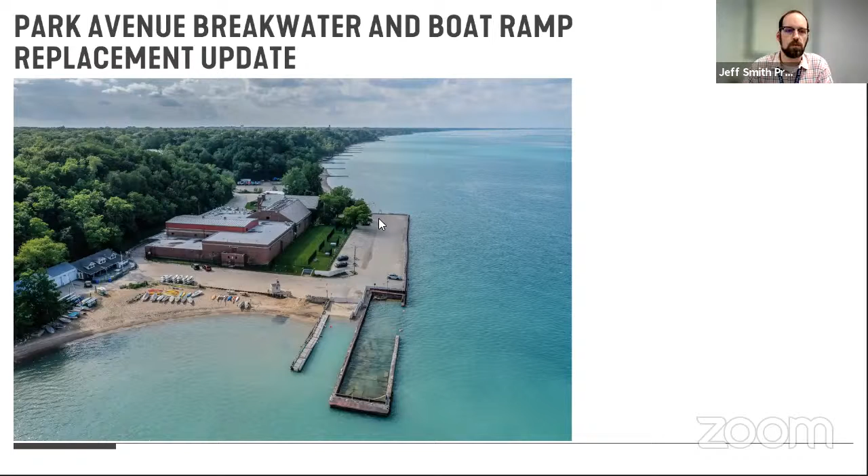So I'll start here, just a reminder of where we've been and where we're going. We are in the final phase 3 of the project that Smith Group is working on. 3.1 was optimize the breakwater and layout, and this was the delivery date for that, and Smith Group did complete that. That was the previous presentation back in October. And then they moved forward with the next step, which is design development, and that they have now completed.

And that's what I'll be providing a summary of this evening. They've also completed 3.3, which is permit application. So they have met with permitting agencies, started to work some of those details out, and submitted plans and applications for that process to begin. And then the final step, 3.4, is the final construction documents. You can see there, January 14th is the final delivery date for those. So we'll talk about the design development, see if the committee has any feedback, and then we would pass that on to Smith Group to make any changes prior to moving to this final stage.

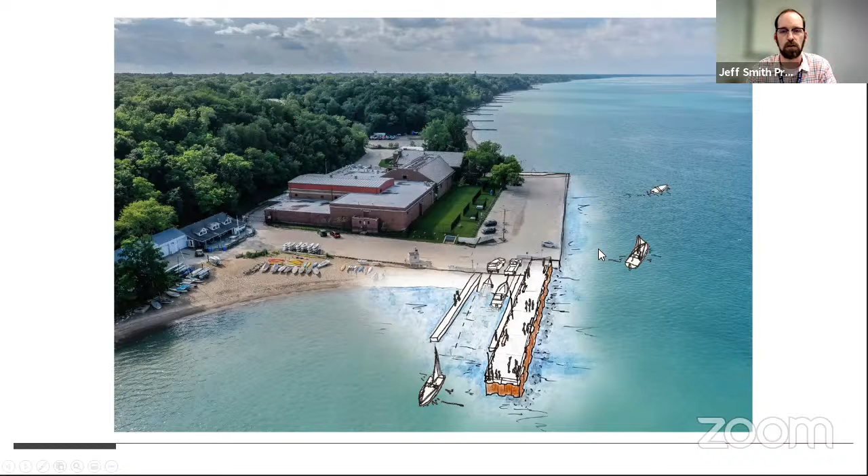So this is the existing conditions. Here is the breakwater structure that's there now, and then we have the launch ramp, and then on the west side is our floating dock.

And now this is showing what the proposed plan is. So this is the new breakwater structure. As I mentioned in that previous sketch, it was set back further here, but now they have shifted it down to align with the edge of the parking lot.

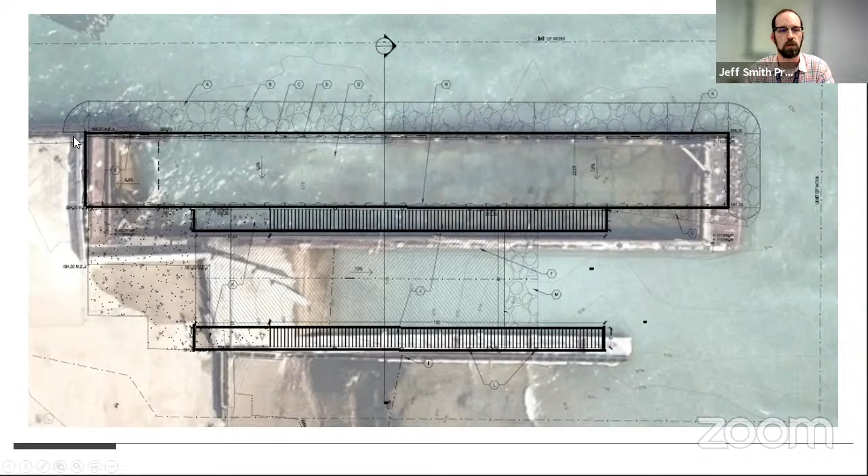There were a few reasons why they originally had it in the other location, but they took the feedback from the last meeting. One of Smith Group's concerns was that it would potentially put us outside of the footprint of the existing structure. But this design has been shown to the regulatory agencies, and they've confirmed it would be considered within the same footprint. The armor stone along the edge falls pretty much in the same footprint, so it won't be an issue from a permitting standpoint.

Secondly, you'll see at the end of this presentation an updated opinion of probable construction cost. They do not feel it would be any additional cost to do this, even though it will widen the boat ramp by about 5 feet.

So here we've talked about, we have floating docks on both sides of the ramp. It's difficult to see from this, but I'll say one change from the previous drawings from Smith Group and their previous cost estimate was they had the floating docks at 80 feet long each, and they've now extended that to 100 feet. So they're each 100 feet long.

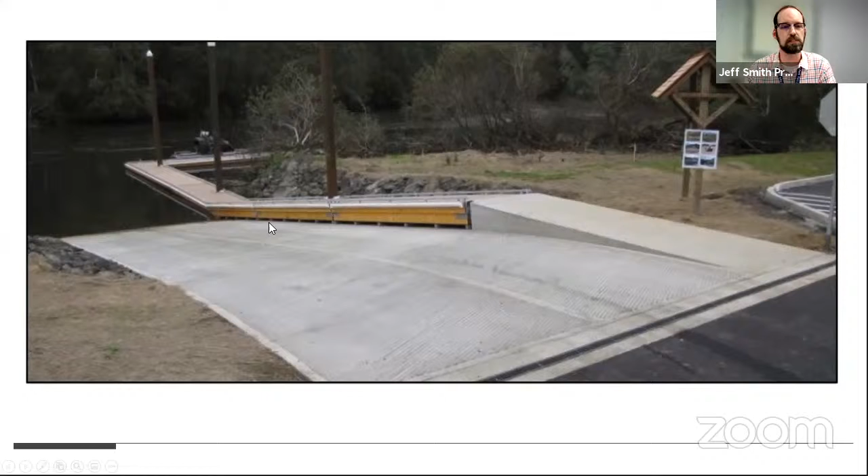Now, I'll start by saying this is from a location where the water obviously varies in height, a lot different than ours. The poles will not be near this high. It probably won't be much higher than the height of the breakwater structure. But the idea is that it adjusts at all water levels. So if the water was up to, let's say, this point, then this section right here would also be floating. So it adjusts, and when it's not floating...

Now, as I mentioned earlier, we had the parapet wall along the east side. In Smith Group's current plan and their current cost proposal, they weren't showing a bollard and chain on the east side. However, staff are considering this as probably a good option.

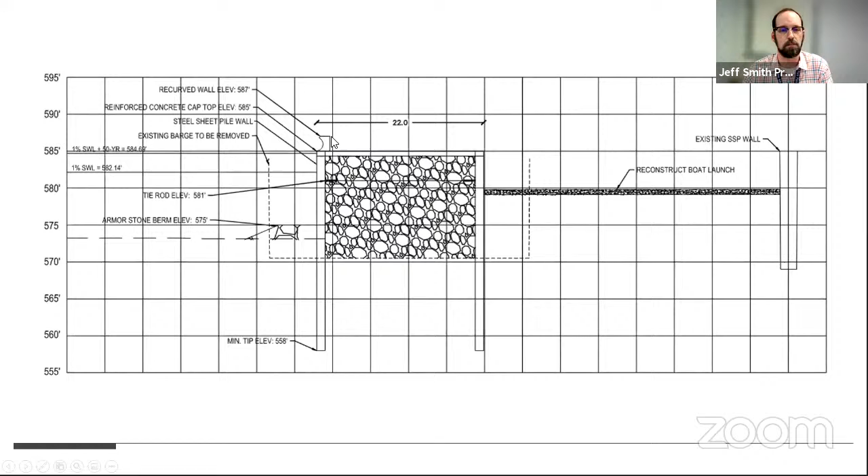And the thought was, though, that if we added the bollard and chain along the east side, we could do it. Actually, I'm going to go back to a photo here. Here's that parapet wall. The bollard and chain could go right here. That, obviously, from a safety standpoint, would be a good thing. It also would deter people from trying to stand, sit, or jump off the parapet wall. You won't see that additional east side bollard and chain in the cost proposal, but it's something we are interested in getting a cost from Smith Group to potentially include as well.

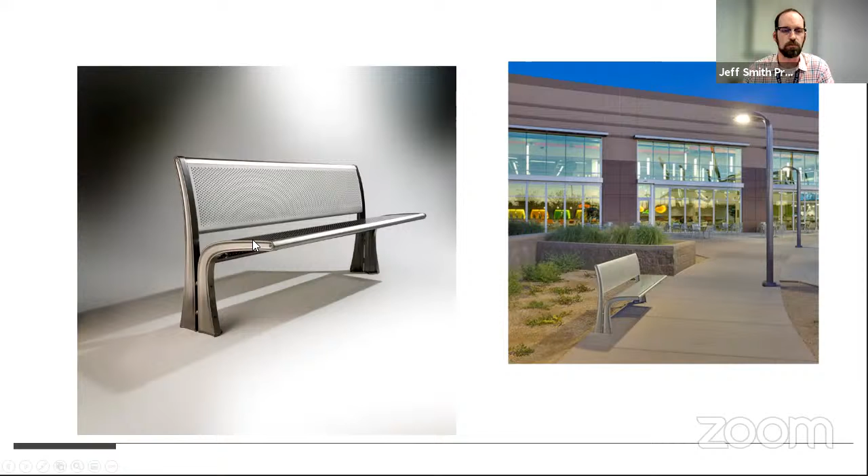Here is the bench that Smith Group is currently specifying. It's likely that these benches would be removed in the winter. This is what we've done in the past on the barge, where the benches were removed in the winter season and then returned in the spring.

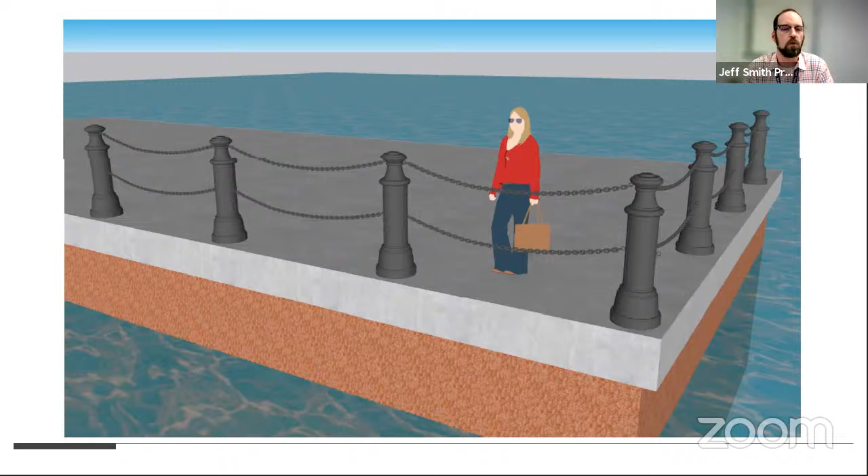Here's a rendering showing the idea of this bollard and chain. I'll add that as far as code requirements go, based on the parameters here and the height and water levels, we are not required to have any type of railing. However, we certainly feel there is some benefit in having something, so this is the railing that they're recommending, and staff certainly thinks is a good fit.

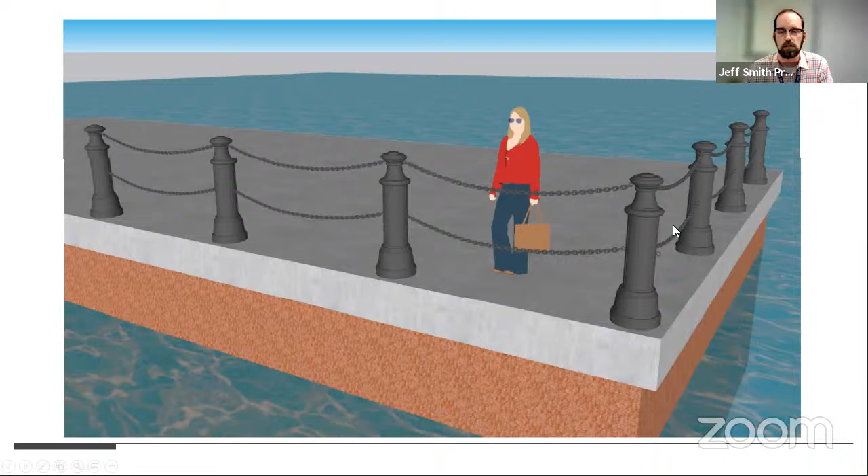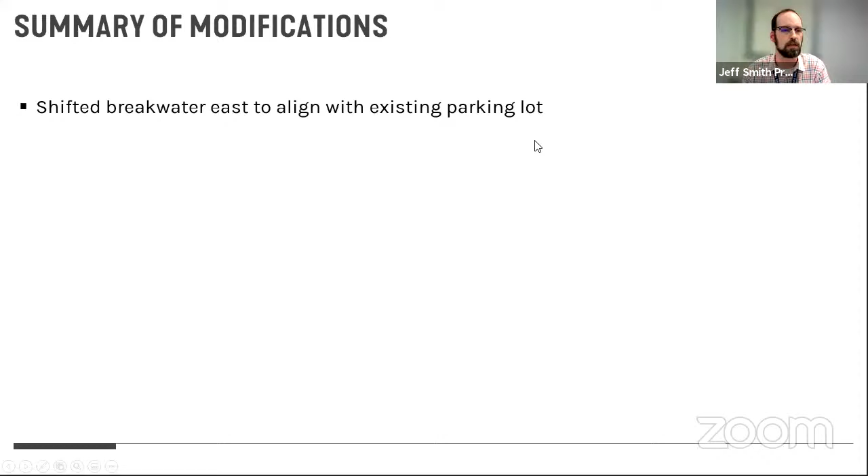So just to summarize some of the changes from the previous presentation to now, at the end of this phase: the breakwater has shifted east to align with the parking lot, we've increased the width of the boat ramp by 5 feet, we've determined it would be concrete abutments for the floating docks and increased the length of the floating dock by an additional 20 feet on each side. The guide piles—the posts we talked about for the floating dock—that system is what's being proposed, and then the addition of bollard and chain on the breakwater.

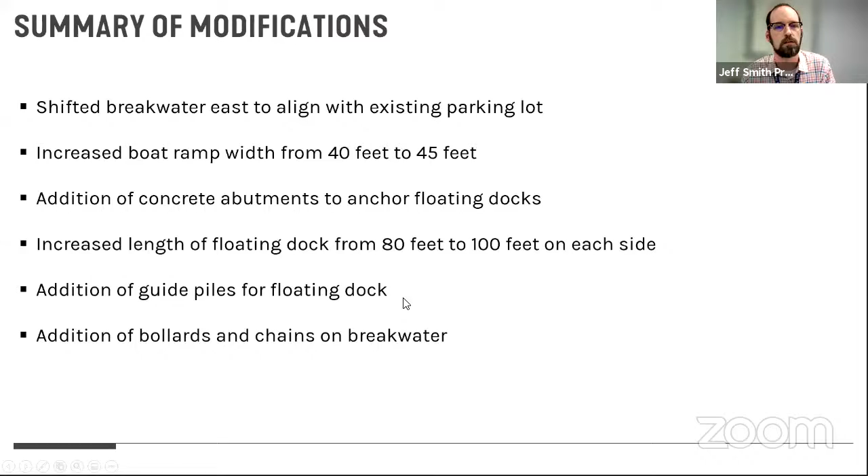So with all that said, this is the current cost estimate. At the end of this phase we get an updated cost estimate, and on the far right is the previous cost estimate shared with the board when Smith Group presented in October, and this is our current cost estimate. Some line items have adjusted as we've gotten a better understanding of the project and refined things, but in the end we're at the exact same price. So the good news is we've increased the ramp by several feet and also increased the length of the boarding docks, but we still have an estimate identical to last month.

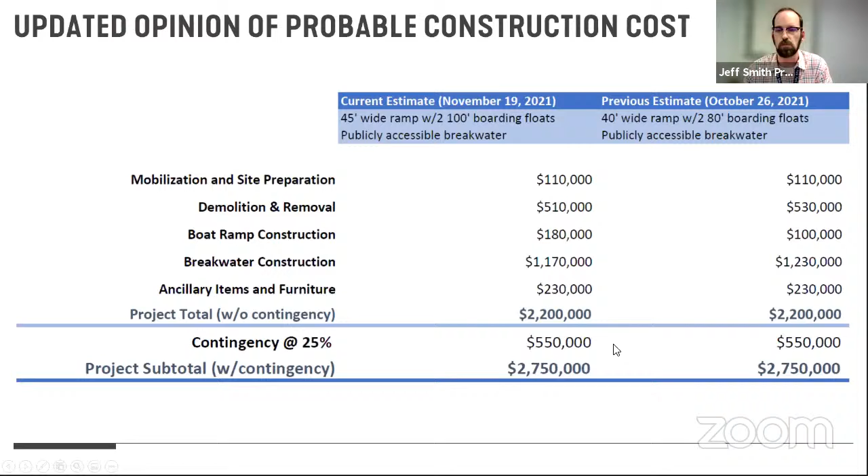I want to touch on some next steps. Staff will continue to review these drawings and receive feedback from this committee. We'll share that with Smith Group, and they'll move forward with the next step, beginning the final construction documents. Smith Group will return to the workshop meeting on December 7th to provide an update to the board. We're targeting January 14th for completion of these construction documents, and later that month we plan to release the bid for this project. We'll likely award that bid in March of 2022, and we're aiming for construction in September of 2022.

With that said, I'm happy to take questions.

Okay, let's go from last to join to first. Mr. Commissioner Bernstein, are you there? Do you have any questions? Yes, no questions. Okay, and how about President Ruttenberg?

Yeah, I have several. Jeff, what's the current length of the floating dock that we use? I believe it's around 100 feet. I'll show you the photo, let me back up here. You can see it actually looks slightly longer in this overlay of where the dock will go, and here's the current floating dock. Okay, so it's right around 100 feet.

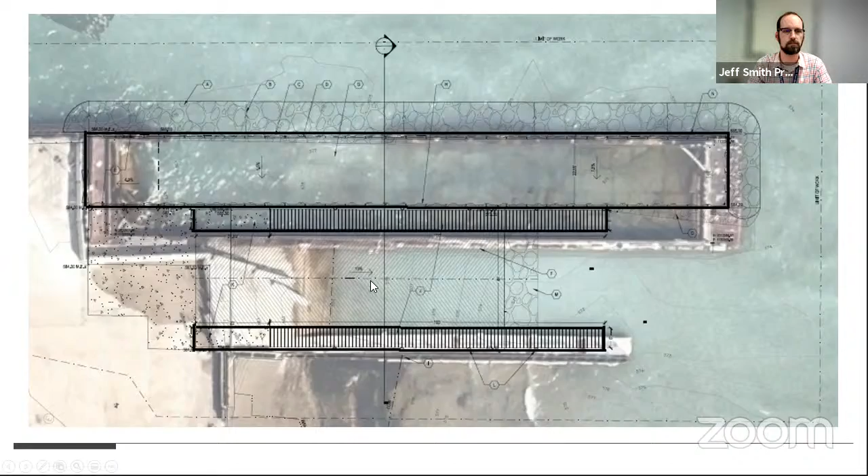The north bollards that separate our facility from the parking lot—can I assume that they're removable so we can get a vehicle out there? Yeah, I described them as permanent, but they're removable, just not as easily removable as these, but yes, they would still be removable in certain circumstances. Okay, because we do need access to maintain the lights at the end, and it will facilitate the Parks Department doing things out there. Correct, yeah, that's an exact conversation we had with Smith about this.

Let me say, I definitely think the benches are cool. And when we look at bollards, we should think about the architectural similarity between the bollards and the benches.

That's just an aesthetic point. There's no question in my mind, as a user of this facility for 15 years, that we do need the chains and the bollards. We need some way to keep the public on the deck and not using it as a springboard for teenagers to dive into the lake. The chains might not completely stop it, but they'll help. I've seen people take a leap off the edge no matter what we do, but it's very dangerous there because of the rocks under the water.

Jeff, why are there two navigation lights? That's what was recommended, but I can certainly talk to them and find out the need for that. Well, I can see a need perhaps to have the middle one as a light to give some light into the boat launch after hours.

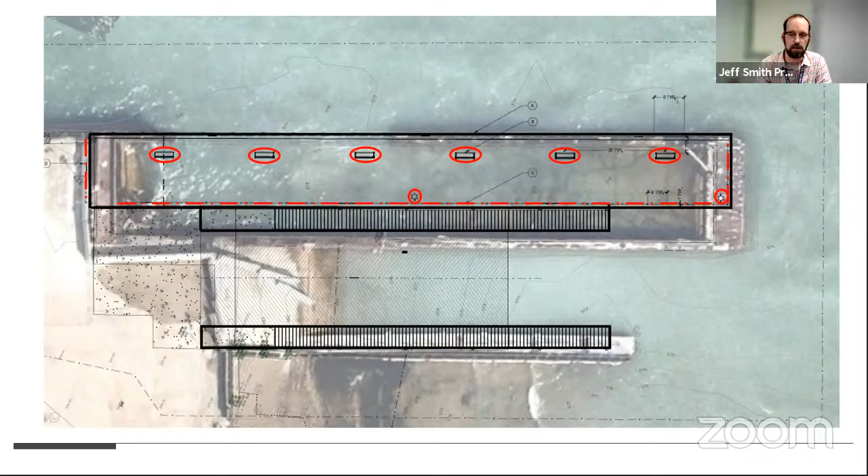My last question, Jeff: are we removing permanently what used to be the supervisor's hut? I don't know if there's any purpose to have it out there anymore. I'm going to leave that to Director Carr to answer, it's more of an operational thing. Okay. Thank you. Sure, I can quickly answer while I'm on the call.

We are looking at some type of structure that our staff would utilize, but that hut has met its useful life. Oh, we definitely have to replace it with something then. When you say for our staff to utilize, for what? We're not going to have somebody staffing the boat launch ramp. This year we did have a coordinator on site, and our plan is to continue to have a staff presence down there temporarily while we work through where to place them. We placed them inside the yacht club this year and may continue that, but we may also look at a different structure. It wouldn't be anything elaborate, similar to what we've had there in the past.

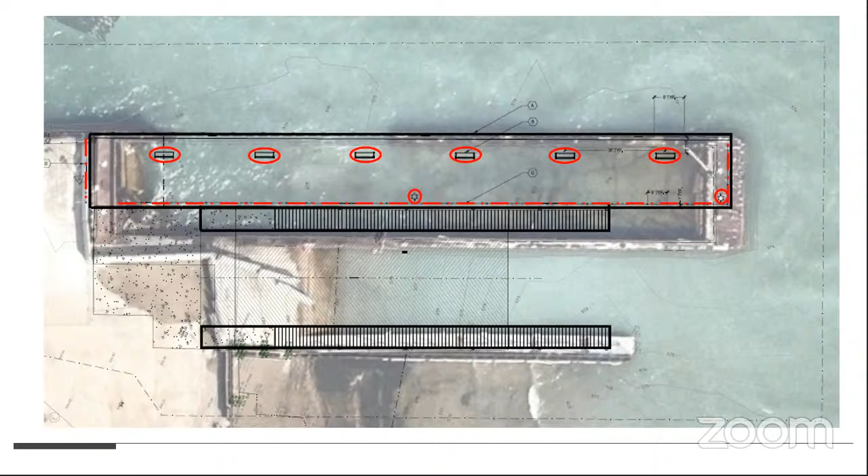Okay, let me stay with that for a minute. One of the prime reasons for putting in the gate was to control access with the thought that we would not need a person down there all the time. So it seems like we're taking a step backwards. This is more about management of the entire property from north to south, the rules, the regulations, the safety, without having lifeguards there, of course, to help manage the property, not necessarily someone accessing the property through their vehicle. Well, that's something for a subsequent conversation, but I think the whole purpose was to eliminate that staff person. But okay, that's another conversation.

Commissioner Kaplan: No questions.

Commissioner Freeman: I like to see this taking more shape, and we're adding some things potentially without adding costs, really being thoughtful about what's down here. I appreciate the work.

I have no questions, but echo Commissioner Freeman's sentiments. Can't wait to see this thing develop.

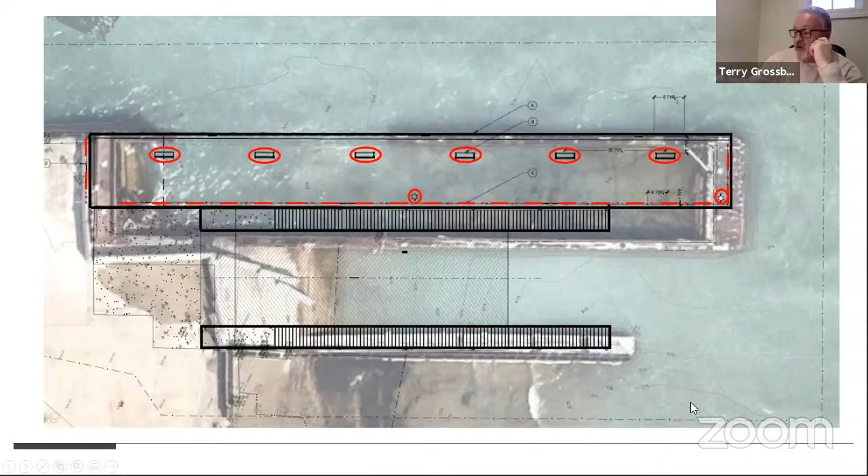Is there any other business from staff or board? Okay, there is none. Go ahead, President Ruttenberg.

How are the plans coming for the north side, and how will it integrate into the development of the south side?

Do you want to take that, Jeff? I'd be happy to. So we have funds budgeted for next year for the north side. However, we are not moving forward with anything until we know about the OSLAD grant, as it's a matching grant, and we have matching funds budgeted for that.

So there's nothing we can do to make the north side look better without the grant? Well, as far as implementing phase 1 of the master plan... Right, no, I understand. The north side.

I'm just hoping we could do something to make it look better, maybe because I know we've got all sorts of internal plans, for example for landscaping. I don't know if that's part of the grant, but there should be some steps we could take. One thing I'd recommend is taking away the 'Come Sail With Us' North Shore Yacht Club sign, which is already getting old and tacky. Let's make a point of doing something for the general public, not just something for the boaters.